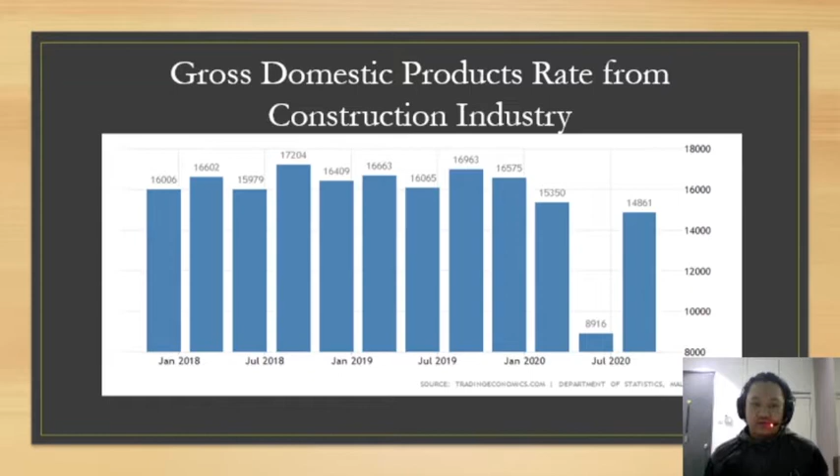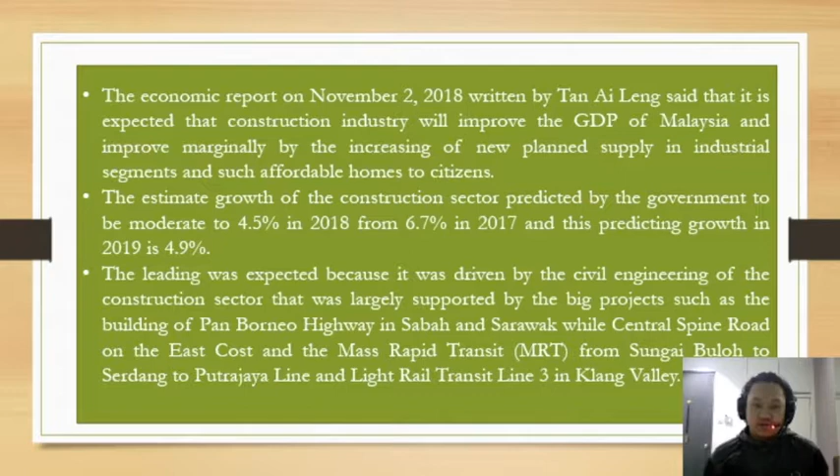The estimated growth of the construction sector was predicted by the government to moderate to 4.5% in 2018 from 6.7% in 2017, and the predicted growth in 2019 is 4.9%. This was expected because it was driven by the civil engineering of the construction sector, largely supported by big projects such as the Pan Borneo Highway in Sabah and Sarawak, the Central Spine Road on the east coast, the Mass Rapid Transit (MRT) from Sungai Buloh to Serdang to Putrajaya line, and the Light Rail Transit line 3 in Klang Valley.

Contribution of construction industry to a higher rate of employment in Malaysia: in 2015, Malaysia faced a small economic downturn. However, construction projects kept going when the government announced that a few big projects were to be developed. This shows that the construction sector was able to provide employment opportunities for the people.

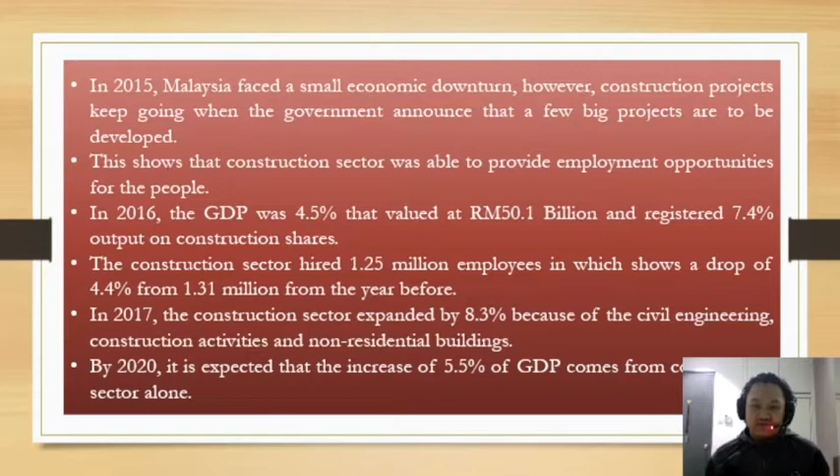In 2016, the GDP was 4.5%, valued at 50.1 billion, and registered 7.4% output on construction shares. The construction sector had 1.25 million employees, showing a drop of 4.4% from 1.31 million the year before. In 2017, the construction sector expanded by 8.3% because of civil engineering, construction activities, and non-residential building. By 2020, it is expected that an increase of 5.5% of GDP will come from the construction sector alone.

That's all from me, thank you.

I will explain about the current performance of Malaysia's construction industry. The government's vision 2020 project is to boost the subsector construction in the project in the next few years, supported by the government plan. Malaysia's construction industry is also expected to recover this year, with a target set at 8.8%, to recover the loss during mid-March 2020.

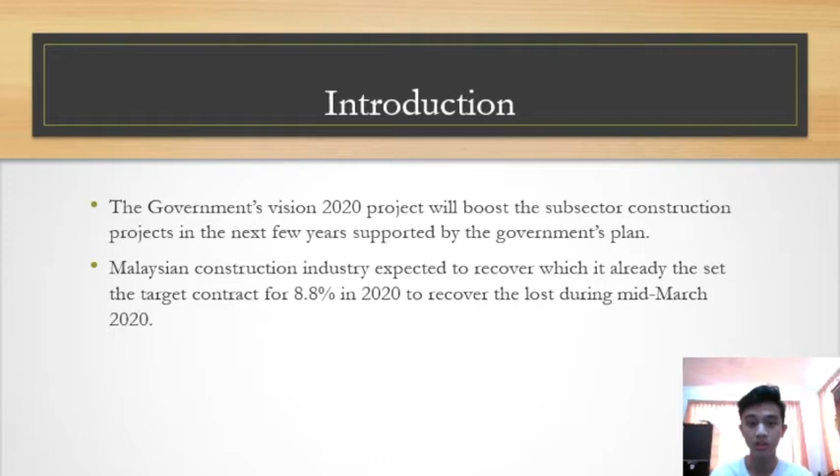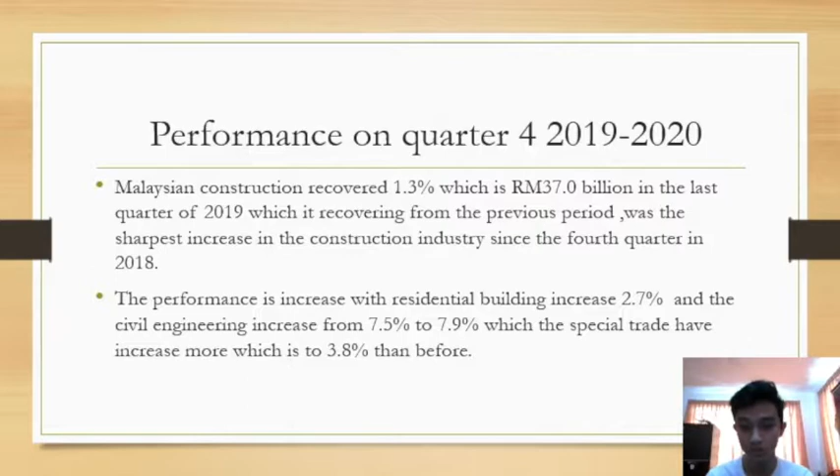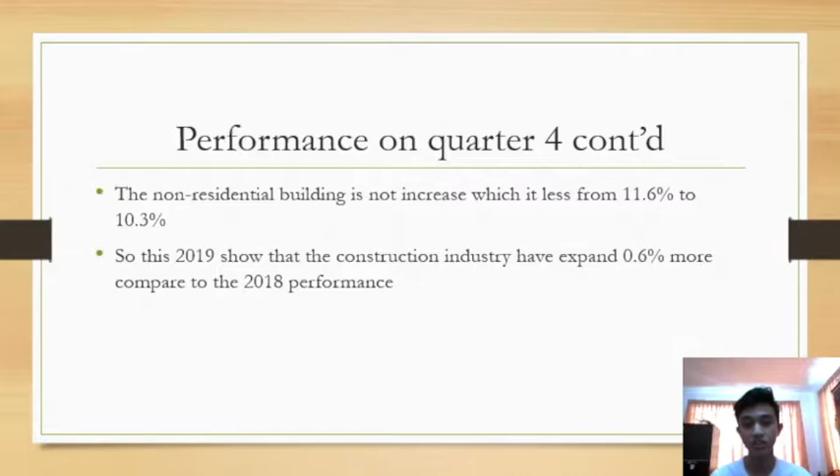The performance increased with residential building increasing 2.7%, and civil engineering increasing from 7.5 to 7.9%, with special trade increasing more, to 3.8%, than before. The non-residential building did not increase, dropping from 11.6 to 10.3%. So 2019 shows that the construction industry expanded 0.6% more compared to the 2018 performance.

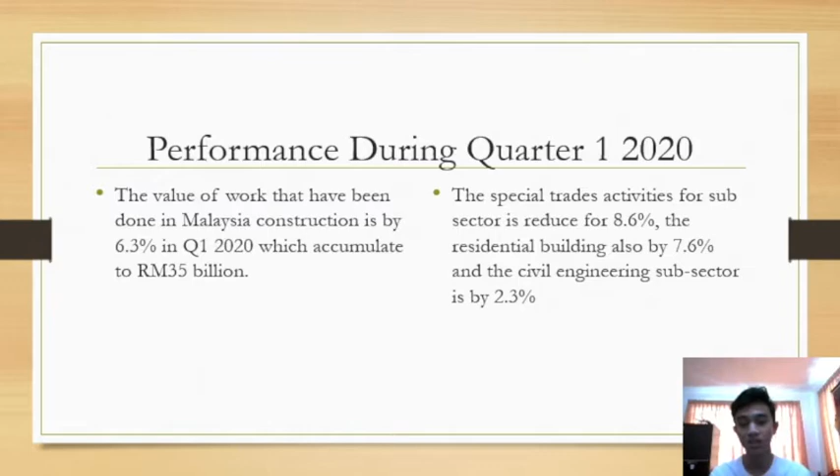During quarter one, the value of work done in Malaysia construction was 6.3%, accumulating to RM35 billion. The special trade activity subsector was reduced by 8.6%, residential building also reduced by 7.6%, and the civil engineering subsector by 2.3%.

During quarter two, construction in Malaysia dropped deeply by 44.9%, following a drop from 6.3% in the previous period. This is the biggest drop in construction on record due to the COVID-19 pandemic.

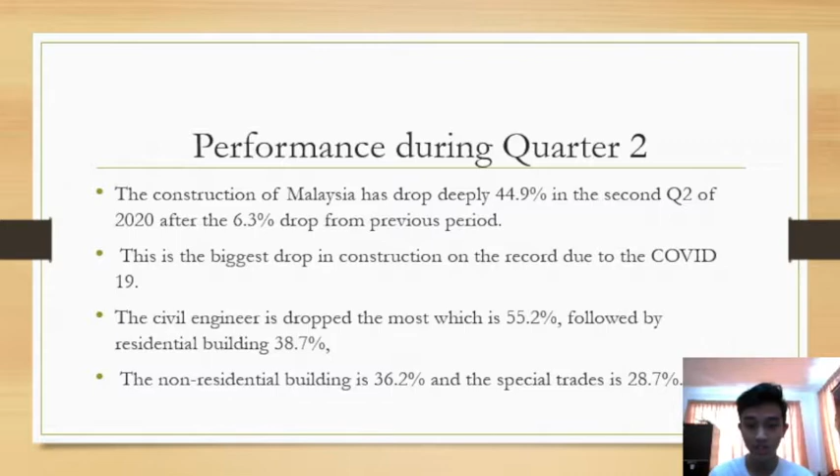The civil engineer sector dropped the most, at 55.2%, followed by residential building at 38.7%. Non-residential building dropped 36.2%, and special trade dropped 28.7%.

During quarter three, Malaysia also dropped 13.1% in September, before which there was a record 44.9% drop due to the COVID-19 pandemic. The value of construction work done advanced by 58.6% compared to the second quarter of 2020, which was RM31.4 billion. This marks the third consecutive fall of the construction industry, with all three subsectors falling: residential building down 12%, civil engineering down 13.6%, and non-residential down 16%.

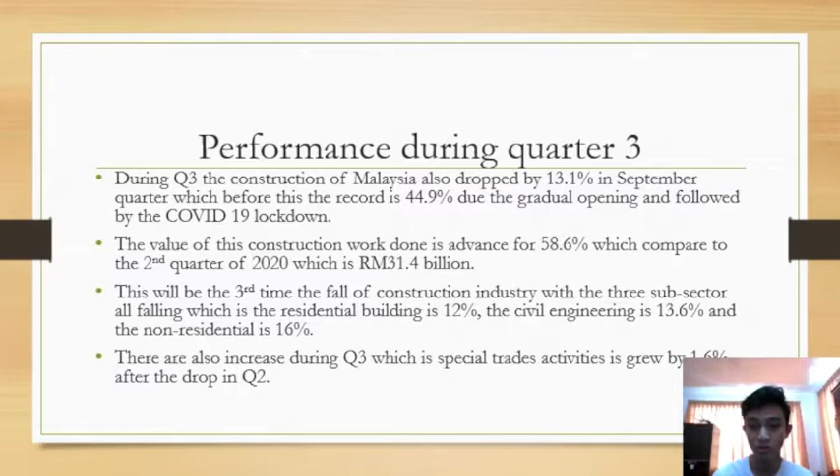There was also an increase in quarter 3, with special trades activities growing by 1.6% after the drop in quarter 2. That's all from me, and these are the references I used for this current performance overview of the Malaysia construction industry. Thank you.

Today, I am going to talk about factors affecting construction project performance in Malaysia. There are many factors that contribute to the success and failure of construction project performance in Malaysia.

The success of a construction project is determined by completion time, budget, specification, and stakeholders' satisfaction. Each client, consultant, contractor, designer, and subcontractor has their own interpretation in determining construction project success. It also depends on project type, size, sophistication, project participants, and the experience of owners.

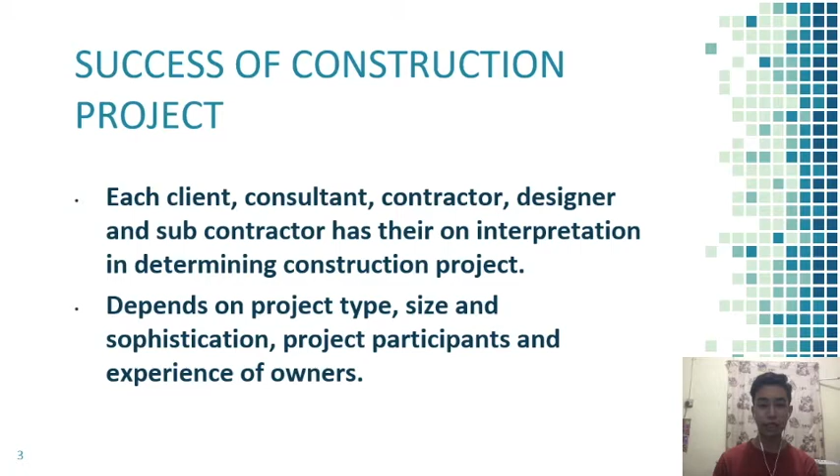This is the top 15 critical factors contributing to the success of construction projects. In this table, financial capability of the client is the major factor critical to success. Apart from that, project stakeholder factors such as competence, cooperation in solving problems, commitment, and communication are significant factors ensuring the success of a construction project. External factors such as availability of resources and weather conditions also play a crucial role in contributing to the success of a construction project.

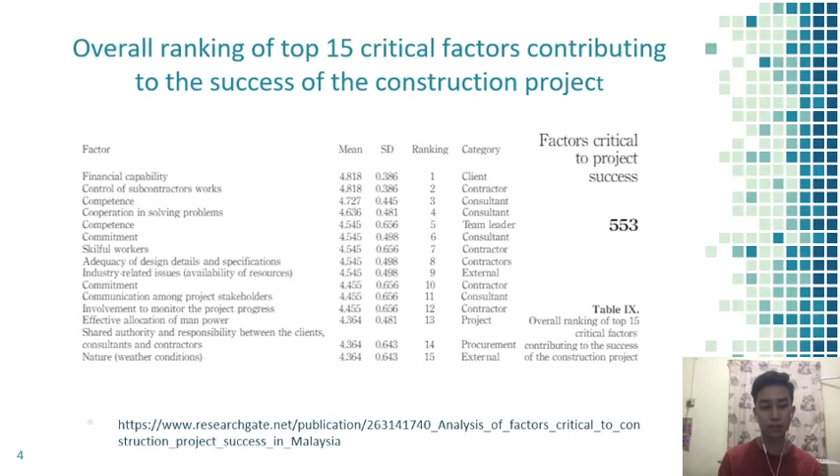However, many public projects are reported as not being completed on time, overrunning costs, and not meeting specifications. Several public projects are reported incomplete, over budget, not meeting the specification of the contract, not functionally suitable, and not within the expected quality.

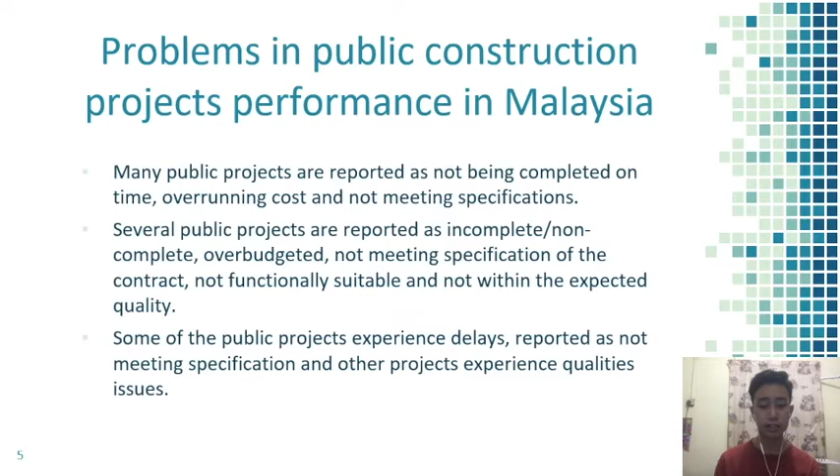So, in order to improve project performance, the industry needs to look into strategies that alleviate opportunistic behaviors and promote better working relationships among project stakeholders. This can be done through the development of mutual trust within the industry. Management must be committed and a quality culture must be created to nurture a positive attitude, and quality implementation reflects the business performance and image of the organization, contributing to the impact of the final construction output.

Thank you. Next, I will continue to the impact of loan moratorium on construction products in Malaysia. First of all, loan moratorium can be known as allowing borrowers to stop making payments for a specific period of time. According to analyst Azanis Shahila Aman from New Straits Times, Bank Negara Malaysia has offered a loan moratorium for borrowers for 6 months during the COVID-19 pandemic.

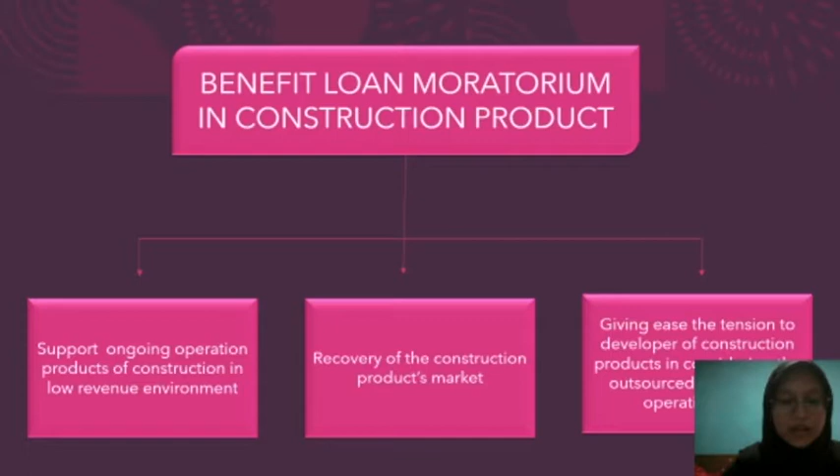There are benefits of loan moratorium for construction products. First, loan moratorium can support ongoing operations of construction in low revenue environments. Next, loan moratorium can aid recovery of the construction products market. It also eases the tension for developers in considering outsourcing to help trim operating costs.

However, loan moratorium also has disadvantages for construction products. According to analyst RHB Research Institute Senior Loong Kok Wen, although there is currently very little demand in property, it might result in pent-up sales upon recovery of the market. In addition, even though Bank Negara Malaysia's loan deferment package is helping to ease the situation, developers still need to bear the operational costs.

That's all. So, in conclusion, the construction industry is very important to the country's economic development, such as its contribution towards economic growth. It contributes to the increase of Malaysia's gross domestic product, and it also contributes to a high rate of employment in Malaysia. Next, the current performance of the Malaysian construction industry has dropped deeply on record in 2020 due to COVID-19.

There are factors affecting construction projects such as completion time of the project, budget, specification, and so on, all of which affect the performance. Moreover, the impact of loan moratorium on construction products in Malaysia gave many benefits, but it also has disadvantages. So this shows that the construction industry is important to economic growth and affects the performance of the construction industry in Malaysia.